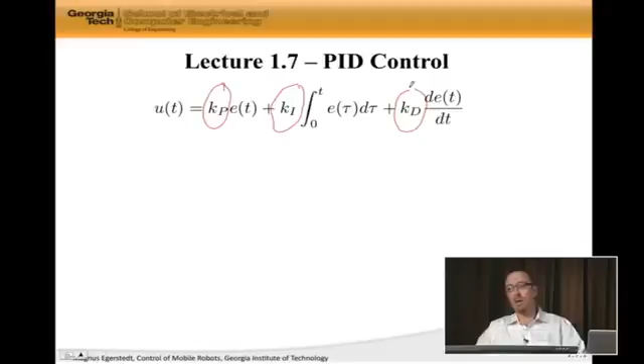Well, first of all, P, as we saw, it's a contributor to stability in the sense that it makes the system, not guaranteed, but it's helping out make the system stable. And it's making it responsive in the sense that if you press 70 miles per hour on your cruise controller, it drives the system towards that value.

I'm calling it medium rate responsiveness because it's not super fast, and in fact the rate of responsiveness is a function of how big KP is. But as we saw, it wasn't typically enough to achieve tracking.

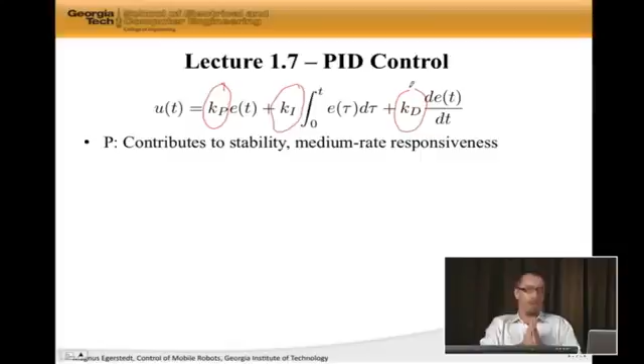Well, the I component is really good for tracking. And in fact, if your system is stable, then having an I component is enough to ensure tracking in almost all cases. It's also extremely effective at rejecting disturbances. So the integral part is a very effective part to have in your controller.

Now, it's much slower in the sense that you have to accumulate errors over time to respond to them because it's an integral. So it responds slower, and there is a little bit of a warning I need to make there. By making KI large, you may very well induce oscillations. So this is not, oh, I'm going to pick all of them a million and go home. No, you have to be a little careful in how you actually select these gains.

Now, the D part, well, since it's not responding to the actual error values but the changes in the error values, it's typically faster responsiveness. So something is about to happen while the rate is changing, so the derivative part kicks in typically faster.

Now, there is a little caveat to this, and that's the derivative is sensitive to noise, because if you have a signal that's noisy and you compute the derivative of that signal, you're going to get rather aggressive derivatives that don't necessarily correspond to what the non-noisy signal would be. So you have to be a little careful with the D part, and making KD too large is typically an invitation to disaster because you're overreacting to noise.

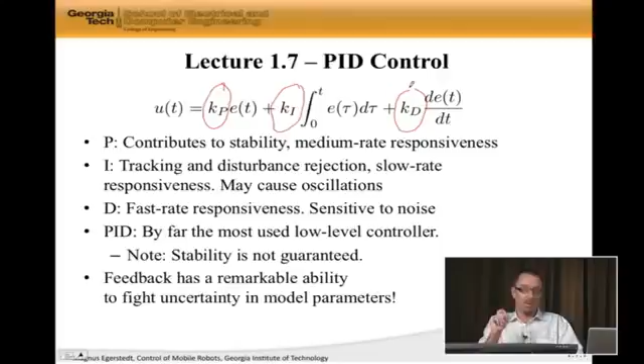And since it is a feedback law, because it depends on the error, it actually fights uncertainty in model parameters in a remarkable way. And feedback has this remarkable ability to overcome the fact that we don't know gamma, we don't know C, we don't know M, but still we seem to do well when we design controllers for a wide range of these parameters.

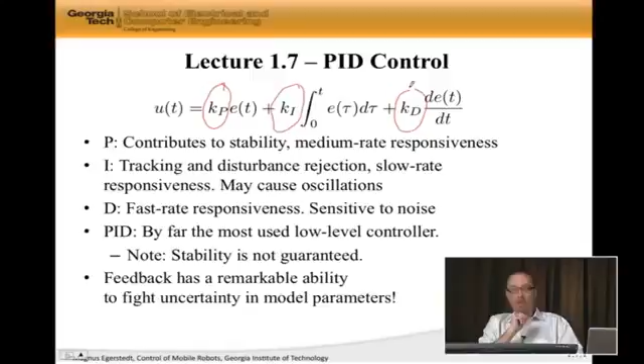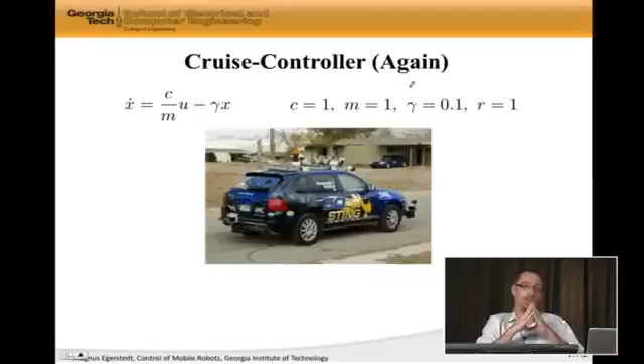So having said that, let's hook it up to our car. And in fact, we had a PID regulator for velocity control on the urban challenge vehicle, Sting 1 as it's called. And we had this model that we've already seen, and I picked completely random and arbitrary numbers here for the parameters, and I even put R equals to 1, so we're going to go 1 mile per hour. Let's say 1 meter per second, it really doesn't matter. But these are arbitrary values, just so you'll see what's going on.

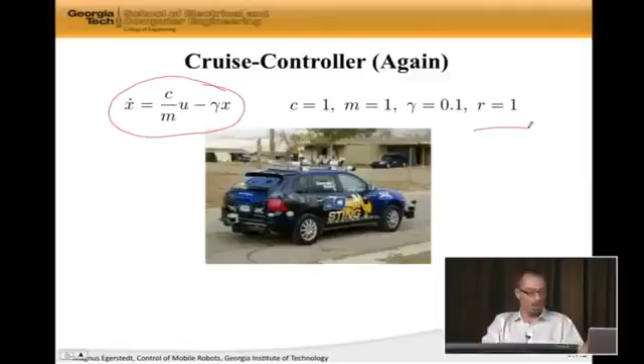So if we start with our friend, the P regulator, so we have Kp equals to 1 here, and all the other gains are 0, then, well, we don't actually make it up to 1. We only make it to 0.9. This we had already seen. So the P part by itself was not enough to both be stable and achieve tracking.

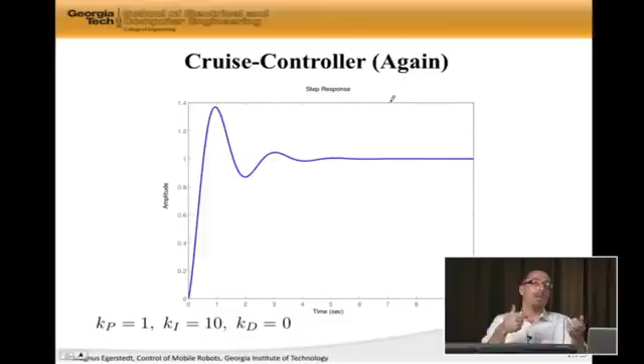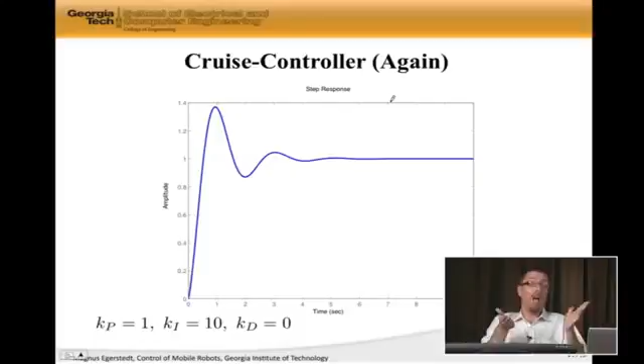Now, if this is so good, why don't we make Ki higher to make it even better? Well, if I crank up Ki to 10, then all of a sudden my system starts oscillating. So this is an example of where the integral part may actually cause oscillations, and we should at least be aware of this fact and be a little careful when we tweak our parameters. And if we see oscillations, that is a clear indication that the integral part is typically a little bit too large.

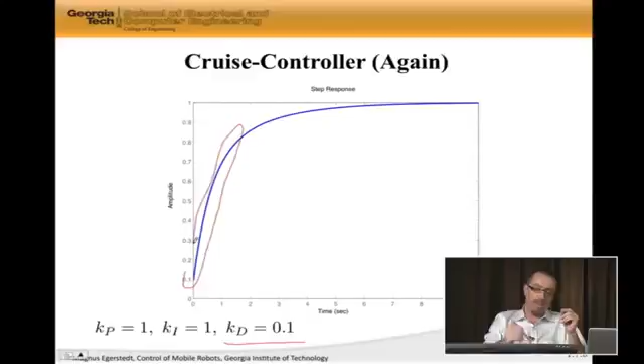But what you're seeing here is that you're getting a faster initial response because of the introduction of a D part. But then we actually get almost a slower response towards the end. So the D part is there to drive it well up in the beginning, but then towards the end, in this particular application, having a D gain that's non-zero, it wasn't even clear if that was useful. But this is some of the thinking that goes into tweaking PID regulators.

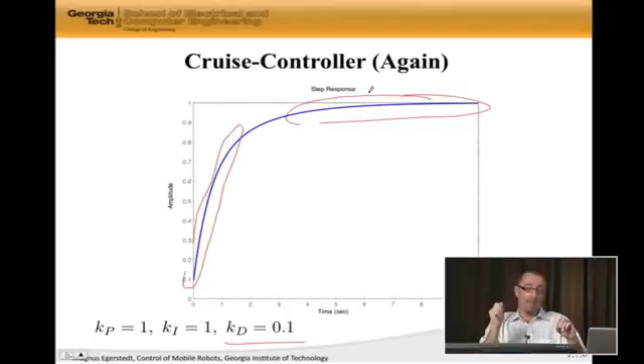So what we are going to do next time is we're going to go now from these rather abstract integrals and derivatives to something that we can actually implement, and we're going to see how these PID gains show up when we control the altitude of a hovering quadrotor.